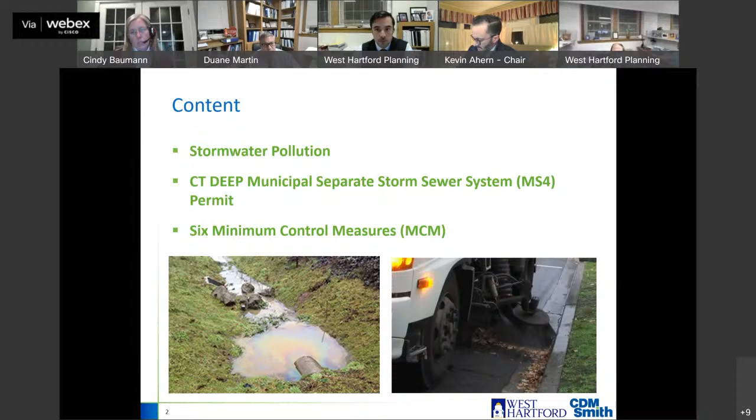I will be presenting, as Duane and Todd mentioned, on the municipal separate storm sewer system, called the MS4 permit requirements, which are part of the Connecticut DEEP permitting requirements. I'm going to go over some background on stormwater pollution, then the municipal separate storm sewer system permit. As part of that permit, there are 6 minimum control measures, which I will go into in more detail. Then I will wrap up with what the town planning and zoning and the IWWA can do to assist with this permit and to comply with it.

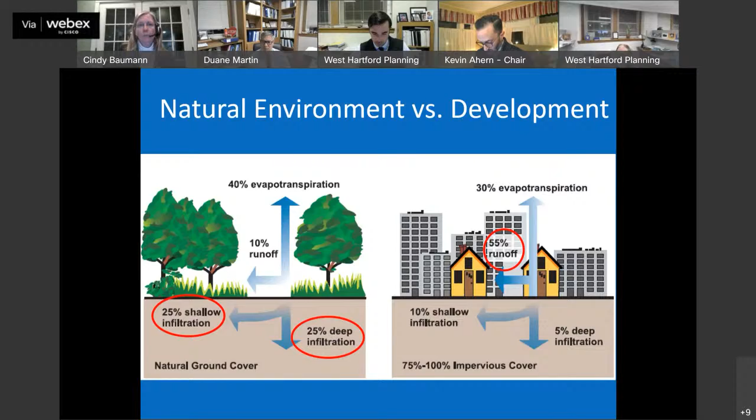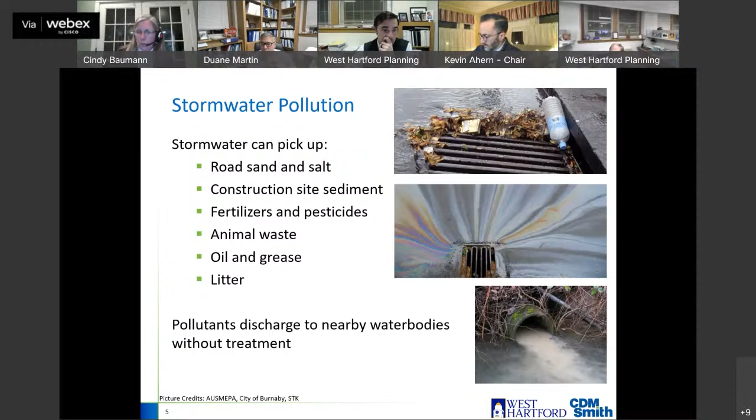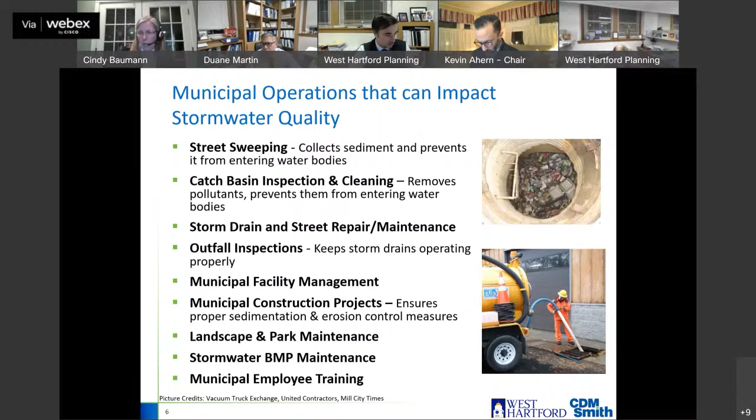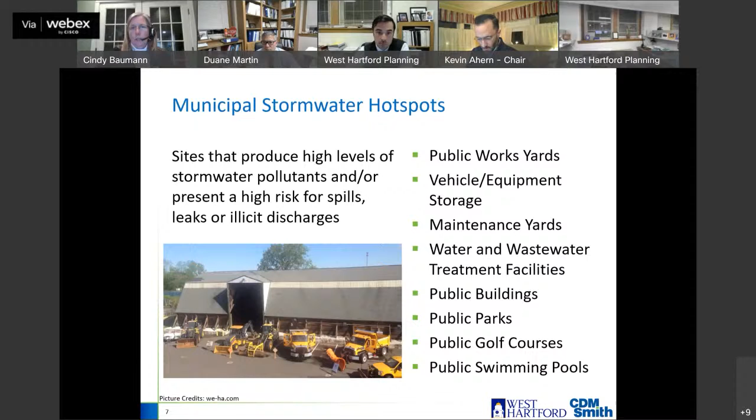And the hotspots can produce high levels of a variety of stormwater pollutants. And also they have a higher risk for illicit discharges, which I'll explain in more detail later, and then also spills. So that is kind of just an overview of stormwater pollution, and I'll take a pause to see if there are any questions.

I have a question. What does BMP stand for?

It is a best management practice. So those are the stormwater best management practices. They can be like a rain garden, or it can also just be like street sweeping or catch basin cleaning - any type of practice that improves water quality.

I just didn't understand the acronym. Okay, thank you. Liz, in your defense, I have all the acronyms here - I had to actually write a cheat sheet for myself, so you're not alone.

Okay, then I will move forward and I will make sure that I explain the acronyms, which I was trying to make sure I do at the beginning of this presentation, but I'm going to move forward now with the municipal separate storm sewer system.

So there's the M and then the 4 S's - that's the MS4 permit, and it's the Connecticut DEEP permit. The Connecticut DEEP has issued both the guidelines for erosion and sedimentation control in 2002, and they have also issued the small MS4 permit. Duane kind of mentioned this, where he had started in the 2003-2004 timeframe on this small MS4 permit. And in the same timeframe, Connecticut DEEP also issued the stormwater quality manual.

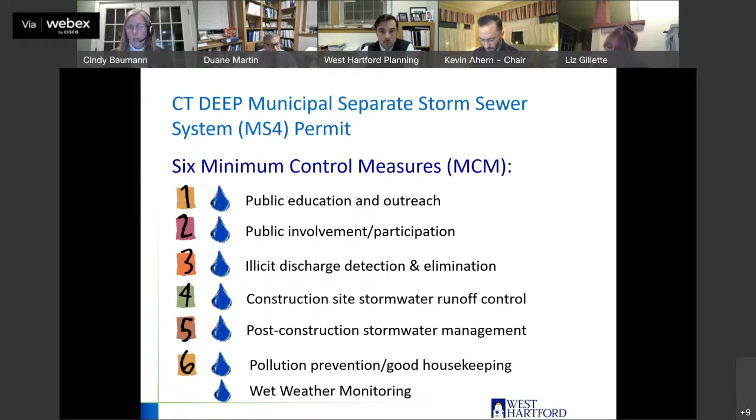So that's just an overview of the permit. We'll just take a pause to see if you have any questions or comments on just the overall permit before I go into each minimum control measure.

I just have a quick question - what is the threshold between a small and something that's not a small? Does that even concern us? Do I even need to worry about this?

Well, the small MS4 permit, there's only one non-small, like there's not a medium really. So the city of Stamford is the only large MS4 that has an individual permit. And then all of the other municipalities, unless you're really small, but I want to say like 90% of the municipalities in Connecticut are a small MS4. So you really won't be the large MS4 unless you're a large city like Stamford.

And the other thing to remember, this is your MS4, your separate storm sewer system. So anyone with a combined system does not fall under this permit. Even though Hartford is large, they do not fall under this permit because they are not a separated storm sewer system. If pieces of their community are separated, those areas would fall under this permit. But a lot of communities with combined systems don't fall under this permit. So you really only have large and small.

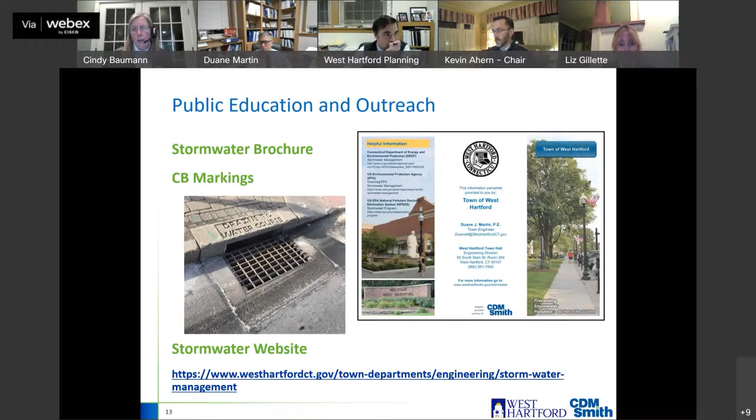And then there are a lot of other public education and outreach items that you do have on your stormwater website. I included the link there for the stormwater website, so you could go on and look at what type of public education and outreach measures have been implemented as part of the stormwater MS4 permit.

So then I've got minimum control measure 2, which is public participation. There were 2 BMPs under this as well, 2-1 and 2-2, which are comply with public notice requirements and then continue stormwater committee meetings.

One of the compliance items under 2.1 is that you are to put your stormwater management plan on your website, and that was done in the 2018 timeframe when that was finalized. Also annually, you have to put your annual reports, and Duane has been very good at putting the annual reports on your website as required under this permit.

You're also supposed to put them out in February for public notice and then finalize them in April. He has been doing that over the last 5 years to get public input on your annual reports.

The next minimum control measure is illicit discharge detection and elimination. This is the one that actually has a lot of BMP requirements, and I think it's the one where the majority of municipalities I work with have to put the largest amount of effort and funding. This minimum control measure includes 8 BMPs.

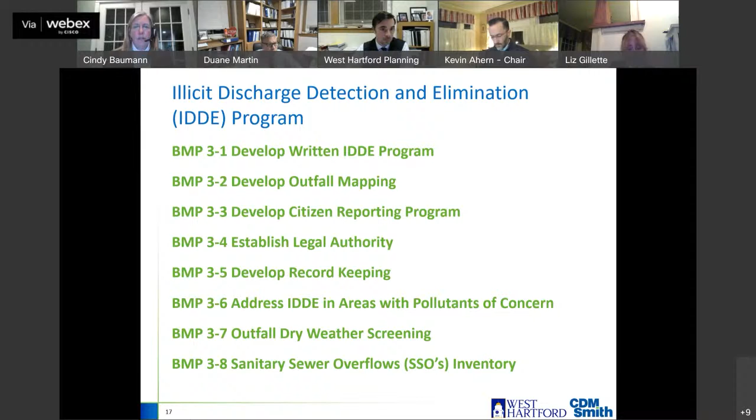An illicit discharge is any discharge to your stormwater municipal separate storm sewer system that does not consist entirely of stormwater. So it has to be something other than stormwater connected to those drainage pipes.

The IDDE program requires you to develop... Question for Cynthia? Yep, so back to that previous slide - it says uncontaminated groundwater. So if there's a construction site and they have to do some dewatering, where can they put that water and still have the town stay compliant? If they have a construction site...

If they're pumping out an area or that kind of stuff, they have to actually put it through a type of sedimentation removal. A lot of times it might be a tank that can remove the sediment, or it can be like a sandbag depression. There are a lot of sedimentation and erosion control measures they can put that water through, and then it can be discharged to the river, the drainage system, wherever it normally went. As long as it's treated and meets the state standard. Fantastic, thanks. Yep.

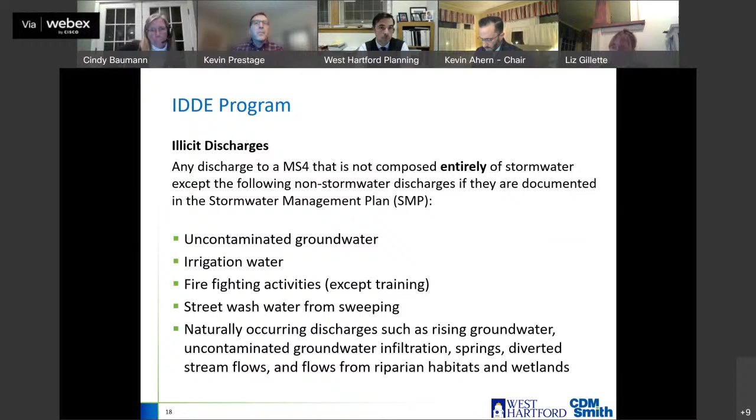The IDDE program was developed in 2018, and the Connecticut DEEP permit has a lot of IDDE requirements - a lot in the permit and a lot in the appendices. As part of this IDDE plan developed in 2018, there were requirements included to address your dry weather outfall sampling, wet weather outfall sampling, notifications to residents and employees, drainage system investigations, and the removal of illicit connections.

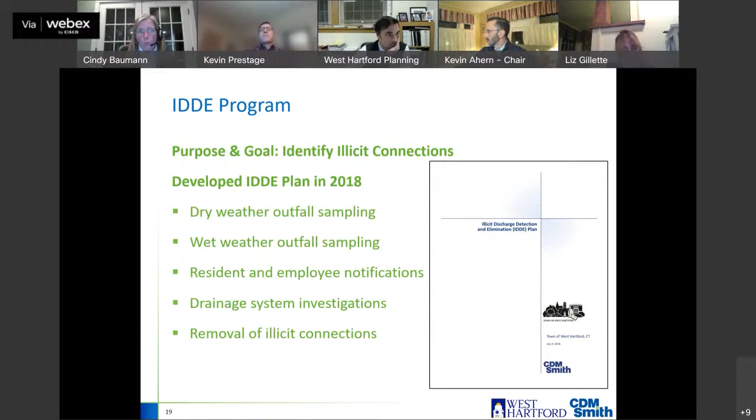I'm going to go over some of these - the dry weather, the wet weather, and the drainage system investigations.

So your outfall screening - you have 418 outfalls in the town of West Hartford. CDM Smith went out and did dry weather inspections of all of your outfalls, going out when there was a dry weather day. There are permit requirements with respect to antecedent conditions and when the last rainfall was, to document that you went out during dry weather.

We would go out with an iPad and document the condition at each outfall. If there was flow during dry weather, we would sample that flow. There's a list of parameters within the permit that we would check to see if there were exceedances for any pollutants of concern.

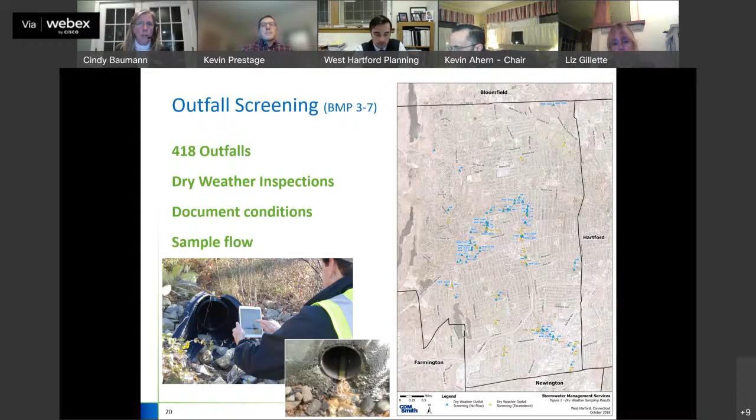So then based on that information, we developed investigations upstream in the systems. We prioritize the outfalls based on the permit. There's permit requirements with respect to how to prioritize, in addition to the results from the dry weather sampling.

We take the outfalls with the highest priority and work up the system, going from manhole to catch basins to manholes, and we sample. If there is flow, we sample for temperature, pH, and conductivity using a meter.

And then we would also do ammonia, surfactants, and chlorine with test kits. If we had some exceedances, we would follow it up in the system and try to identify where the exceedance is coming from. Typically we would identify a manhole with exceedances, go to the next upstream manhole, and it would be dry, or there would be flow without the exceedance. So we'd know something is happening between the two manholes.

So then we would recommend to the town to do CCTV inspection - that's closed circuit TV inspection of the pipe - to see if we could figure out if a particular resident or business was tying in somewhere between those manholes, or if there was some kind of crack in the drainage pipe that was also connected to a crack in the sewer, hydraulically connecting the two.

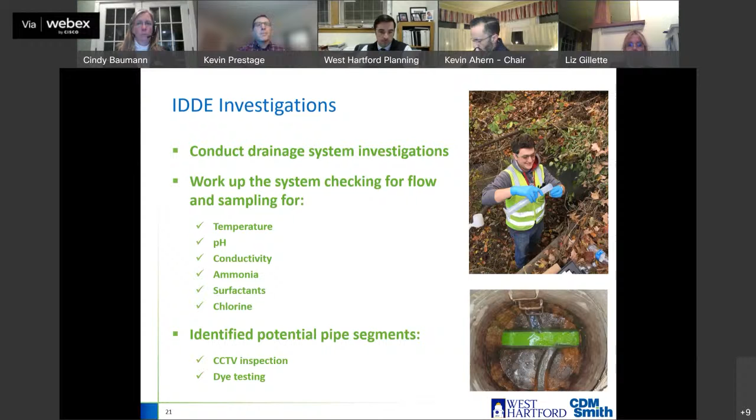It's usually caused by either a blockage in the sewer, where the downstream pipe is blocked and it has to come out the manhole, or it can also occur during I&I, which is your infiltration and inflow.

So during rainfall, when the sewer system is taking in rainfall runoff or groundwater and infiltration, and it does not have the capacity to convey the sewer flow plus the infiltration and inflow, you have a sanitary sewer overflow. You can also have a malfunctioning downstream pump station or a broken sewer line. It's important to identify these, and as part of the MS4 permit, you have to track and document them. There are also reporting requirements to Connecticut DEEP with respect to sanitary sewer overflows.

So this is the end, the last slide of the IDDE, where I wanted to give you some examples of where you may see an illicit connection and should report it to Duane in engineering so they can document it and potentially remove that illicit connection.

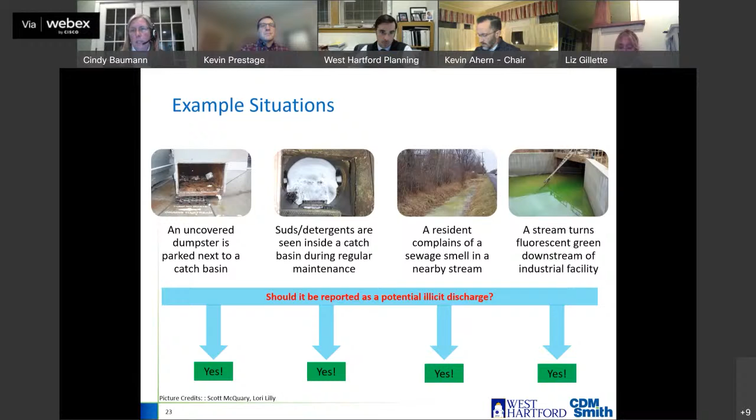So all four of these examples are ones that if you see it while out and about, or a resident sees it and tells you about it, it is a potential illicit connection, and it should be documented and followed up. That is the end of the IDDE, and I'll pause here because I know this is a big program and a big component of the MS4 permit. So I'll see if anyone has any questions.

Liz: I'm just curious, I'm not asking for a final or exhaustive list, but do we have a lot of problems in West Hartford when you've done the checking of the outfalls? Compared to other municipalities, are we...?

You do not. I think it has a lot to do with not having as many older systems, because I do see the older the municipality, the more problems—and not necessarily just older, but older and industrial. I also think West Hartford is proactive. I don't know what you've done in the past, but you've had a positive impact, so you don't have as many illicit connections compared to a lot of the other municipalities I work with.

I just wonder if we've got suds in all our sewers or not. That suds picture is actually from Hartford. Of course it is. Thank you. Yep, Cindy, thank you.

If I can just ask, or rather add a little additional information—if you go back to the slide on the sewer overflow. On the sewer, this one? Yep, yeah, that one right there. Thank you. So Duane Martin, I just wanted to comment.

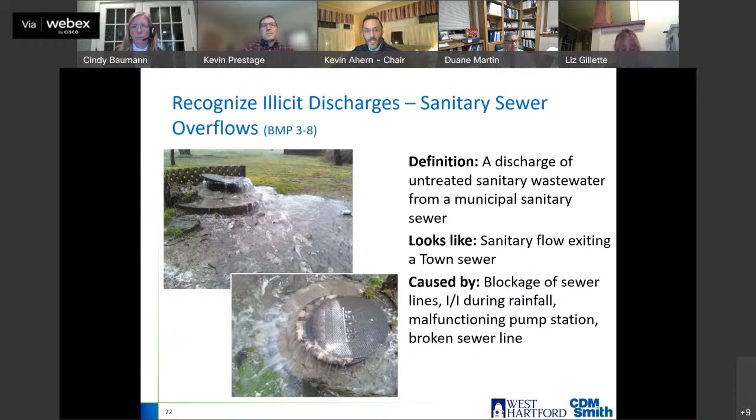So I'm going to go over minimum control measure 4 now, which is construction site runoff control, with respect to your sedimentation and erosion control measures.

Before you go through these BMPs, this area in particular has the most relationship to the role of TPZ and IWWA, and it's important to understand where you are in the broader context of this larger permit. When you go through an approval process, you'll see that we do reactive and proactive enforcement of the approvals you grant to different land uses, as Cindy will show in these slides. This part in particular has a direct relationship to the work you do for the community.

Go ahead, Cindy. Thank you. So this minimum control measure for construction site runoff control has 5 BMPs.

It's implementation and enforcement of land use regulations, development and implementation of interdepartmental coordination, review of site plans for stormwater quality, conducting site inspections for sedimentation and erosion control requirements, and implementing procedures for public comments.

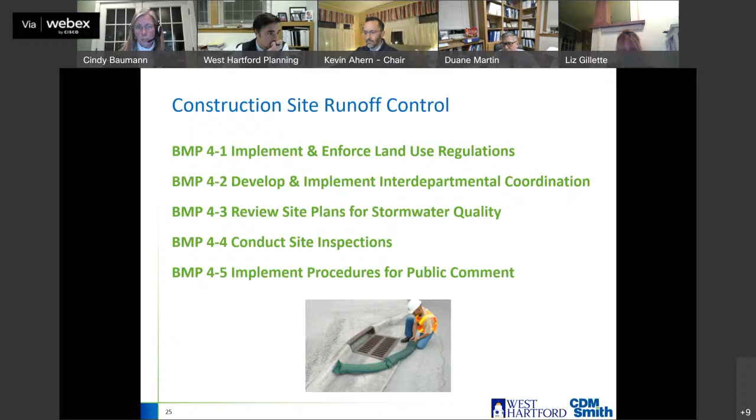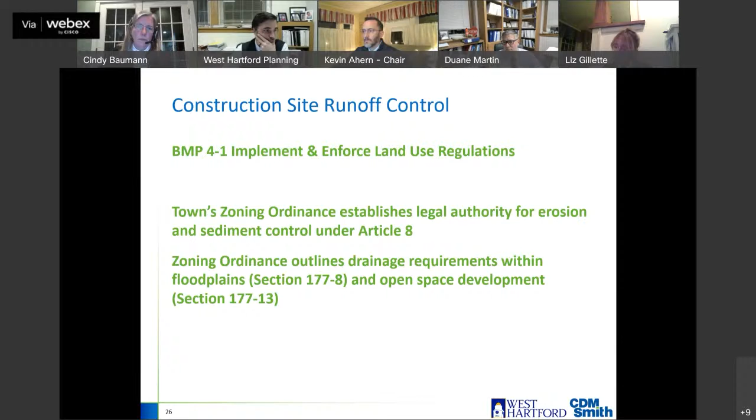I'll go over 3 of these BMPs in more detail. With respect to BMP 4.1, implementation and enforcement of the regulations, the West Hartford Town zoning ordinance establishes legal authority for erosion and sedimentation control under Article 8. The zoning ordinance also outlines drainage requirements within floodplains and open space under sections 177-8 and 177-13 respectively.

The Connecticut DEEP has guidelines for erosion and sedimentation control, this is the 2002 manual released to give guidance on soil erosion and sedimentation control requirements. I want to touch on two main pieces of this document.

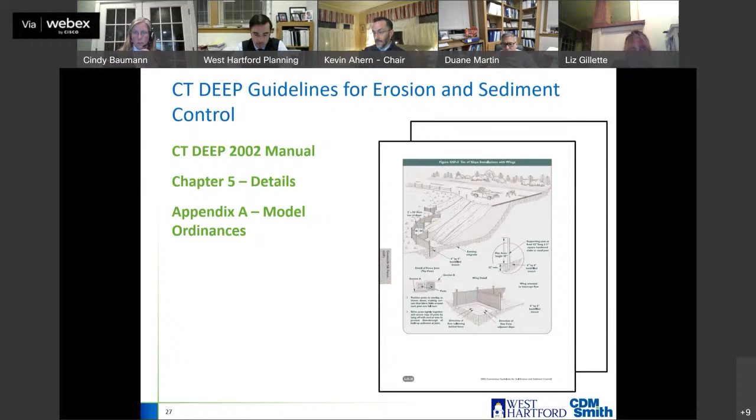The first is the Chapter 5 details, which provide a lot of guidelines with respect to different sedimentation and erosion control measures. I pulled out an example here, a silt fence, which gives details, requirements, and recommendations. It's a good resource both for contractors who want to use these details, and for you when you're in the field doing inspections and want to refer to a document to support what you require from the contractor.

Appendix A of this manual also has model ordinances and some model ordinance language to include with respect to sedimentation, erosion, and control within your ordinance.

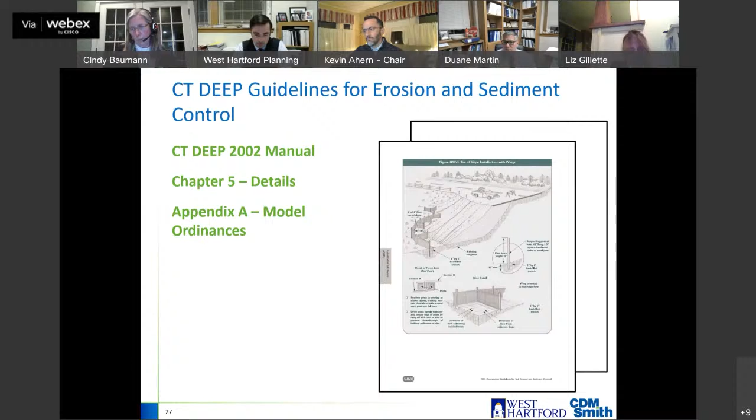I did a little background work, mostly with Todd, and he provided some information because you guys do really well with inspection reports. I have an example here of a recent report where you went out in response to a complaint, conducting soil erosion and sedimentation control inspections.

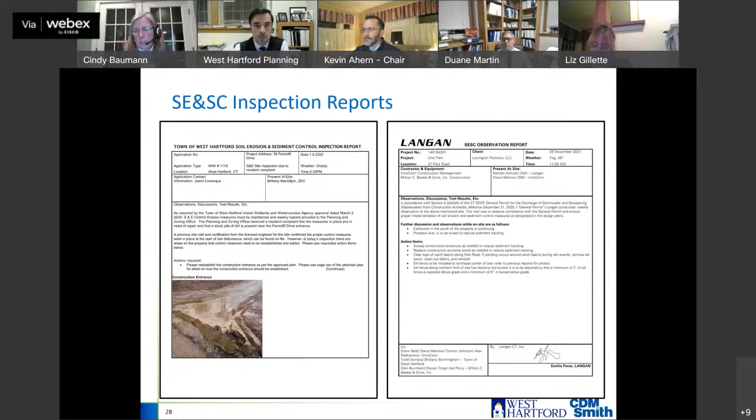I also have an example of one where a contractor submitted a report, as required under the MS4 permit for annual submittal of sedimentation and erosion control reports from contractors. This example was submitted by InnoCon Construction Management, who provided a second page with very good photos of what they're doing on that construction site.

Cindy, if I could add, these often come as conditions of approval from your wetland authority or special use authority, or in this instance on the right side of the screen, council's SDD conditional approval. It's to perform weekly or bi-weekly S&E control inspection reports, or after significant rainfall events. We get the reports, read them, follow up accordingly, and there are action items for correction or items to address. The item on the other side is an IWW approval.

Cindy, could you touch upon the fact that there's actually a threshold trigger, a certain acreage, at which these reports are required?

If it falls under an acre, they're not required. Is that accurate? It's a 1 acre threshold. A lot of our inspection reports and sites are under 1 acre, but we still do the same reporting and inspection requirements regardless of size, because they can still have a negative impact in terms of offsite erosion. The example on the left, that property was under 1 acre and wouldn't have been triggered under the normal requirements, but we still apply them.

That's a great credit to both Brian Pudlick, Associate Planner, and our zoning enforcement staff. They stay on top of these, and we apply them at all scales, even those that aren't required by the MS4 permit. That is typical with most municipalities, that they apply it to all construction, and don't really require that 1 acre or above.

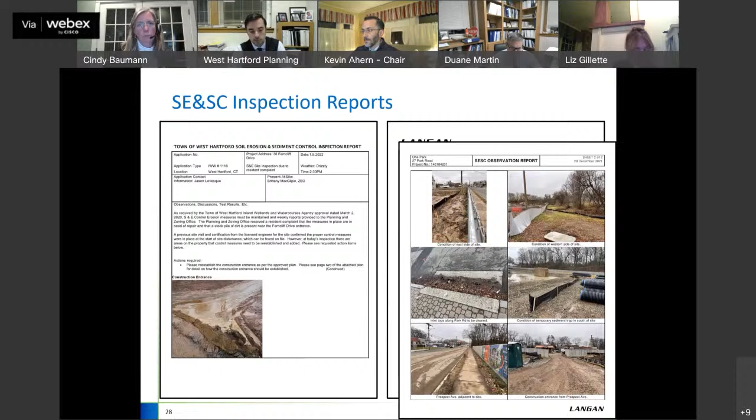With respect to construction and illicit discharges, these discharges from construction sites are considered illicit discharges under the MS4 permit. When they have soil erosion and sedimentation control measures that are not performing correctly, you get heavy sediment and turbidity and discharge of runoff from the site that's not just stormwater. So when you see brown or cloudy water coming off a construction site, that is an illicit discharge, caused by improper sedimentation and erosion control measures.

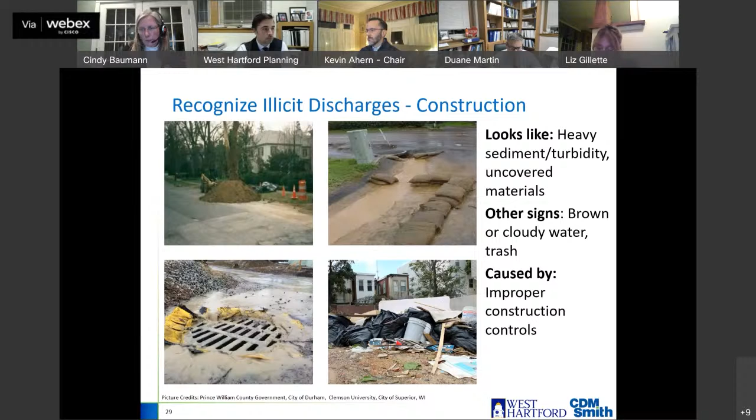So that is minimum control measure 4. I'll pause for a minute in case there's other questions, because that's a big one. TP&Z and IWWA do play a big role in minimum control measure 4, as well as the one coming up, minimum control measure 5.

Okay, so we'll move on to minimum control measure 5, which is your post-construction stormwater management. This minimum control measure has 5 BMPs as part of your stormwater management plan. The first is establish low impact development authority, and then enforce those low impact development requirements. Implement your long-term maintenance plans, and then directly connected impervious area mapping.

I'll go into more detail because I know the DCIA, or directly connected impervious area, is probably unknown, or you probably don't really know what that entails. The last BMP was just post-construction in areas with pollutants of concern.

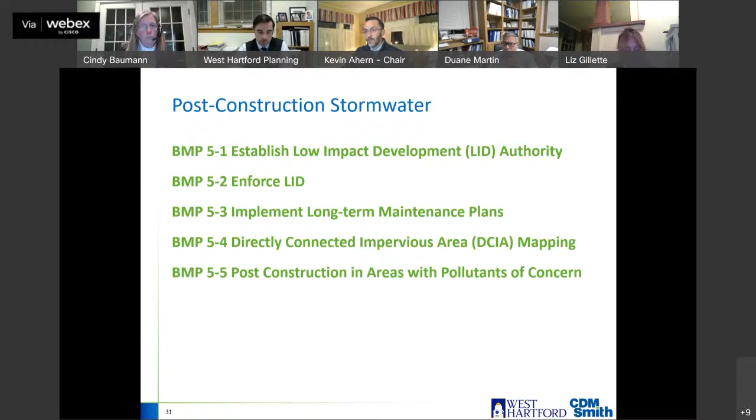With respect to establishing low impact development authority and enforcing this low impact development, a review of your regs resulted in the 3 comments I have below. The town subdivision regulations require review of subdivision drainage system plans. The town's plan of conservation and development provides guidance on what should be included in the stormwater management plan, including implementation of best management practices and low impact development.

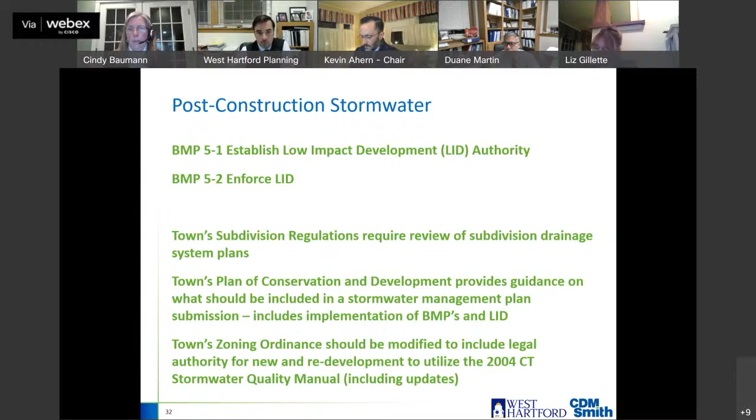We do make a recommendation that the town zoning ordinance should be modified to include legal authority for new development and redevelopment, and to utilize the 2004 Connecticut Stormwater Quality Manual, including the updates. The updates do incorporate a lot of these low impact development recommendations and requirements.

So the 2004 Connecticut DEEP Stormwater Quality Manual included a lot of stormwater requirements, and it also started to include low impact development requirements in the amendment in 2011. I wanted to touch on 4 different parts of this manual. It's a very good manual to use.

Instead of every municipality creating their own stormwater requirements, you can incorporate language requiring a developer to meet the 2004 Connecticut Stormwater Quality Manual, and then you don't have to be the one developing all the requirements. Most Connecticut municipalities are doing this, referring in their ordinances to this Connecticut Stormwater Quality Manual, including appendices or amendments.

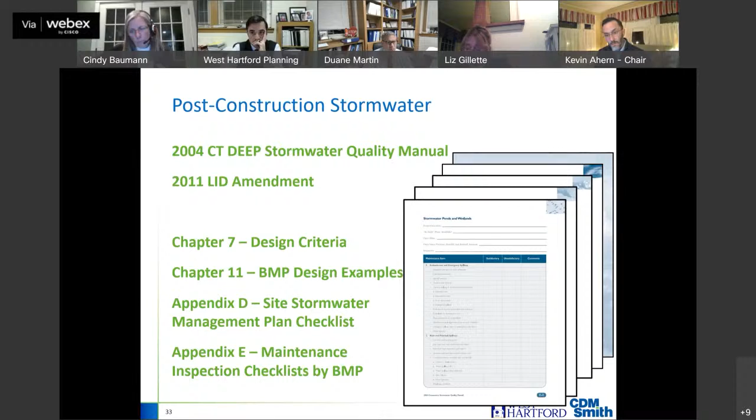The other piece that is part of the requirements in minimum control measure 5 that we're in right now is this DCIA - directly connected impervious area. This is where you have impervious areas that are directly connected to each other, and directly connected to the drainage system. As part of the permit, they wanted the town of West Hartford, and every municipality under the MS4 permit, to develop a baseline directly connected impervious area for your municipality.

The town of West Hartford has done that. You guys are 14.4% of your townwide area is directly connected impervious area, and that equates to about 2,066 acres. The MS4 permit requires you to do a 2% reduction in this DCIA over the permit term, and then a 1% reduction for every year following the permit. So that 2% reduction is 41 acres.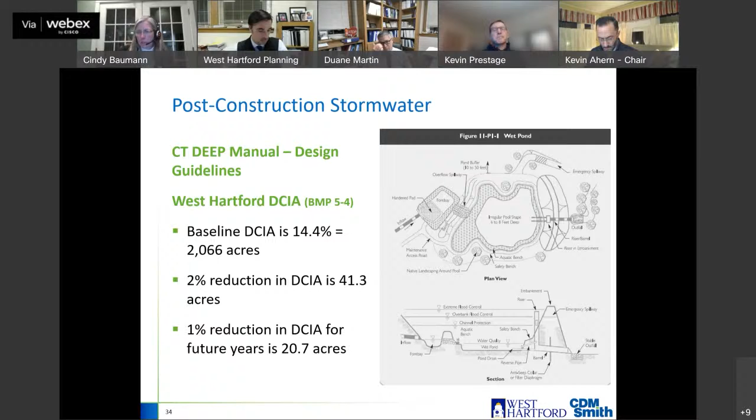Okay, so I have a little bit more on this minimum control measure, mostly with respect to low impact development. I have an example here of implementation of low impact development in a redevelopment site: the Capitol property in Hartford. CDM Smith was fortunate enough to work with the city of Hartford at the Capitol, and we implemented, I want to say about 6 or 7 years ago, stormwater BMPs, best management practices, at the Capitol.

This is to improve water quality, and it's also a really nice pilot place where you can go—they have a pamphlet, and you can walk around the site and see these low impact development BMPs in place, and they were all retrofits. We constructed 3 rain gardens at the main entrance, 2 on either side, and then a little ways up we also did permeable pavers at the crosswalks and in an island, and then we also did a green roof.

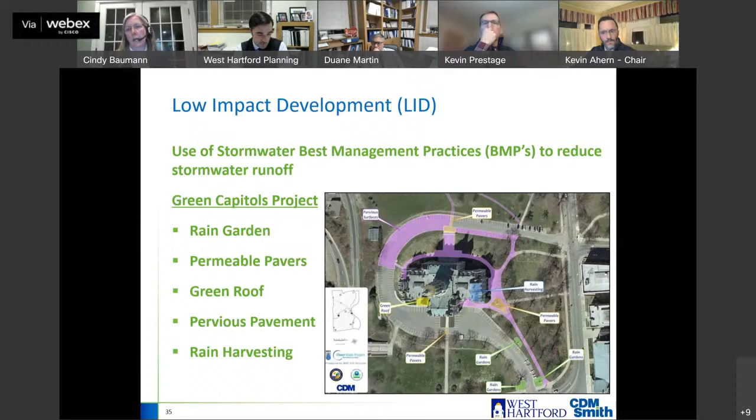I do have a question about the pervious pavement. In some areas it's in great shape—they've done it out at Whole Foods in Avon, and I'm very curious to watch that. In other areas, talking with legislative management, they've had real problems with frost heave, it breaking apart and disintegrating in spots.

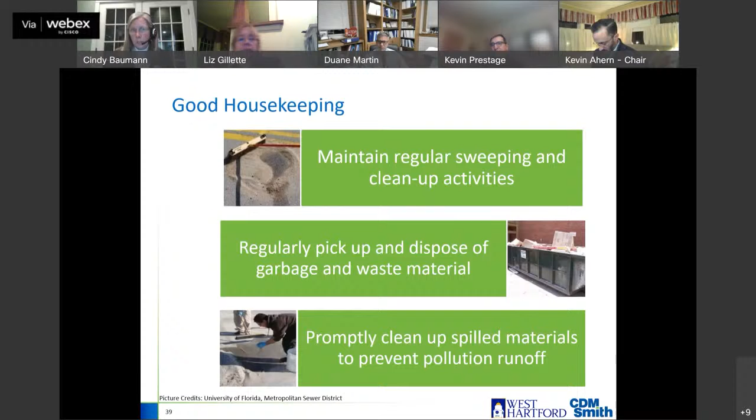So the last one is wet weather monitoring, added on to the 6 minimum control measures. This one is kind of weird because it's just called an S instead of a BMP or minimum control measure, like 1-1 or 2-1. It's called S, and I don't know why, but that's Connecticut DEEP. So wet weather monitoring has these BMPs S1 through S4.

What's required in the permit is you actually have to go out during a wet weather event and do outfall screening. You have to do an inventory and mapping of all the discharges, the outfalls that discharge to impaired waters. I'll show you a map in a minute with the impaired waters in the town of West Hartford, and then there are follow-up investigations based on that wet weather screening.

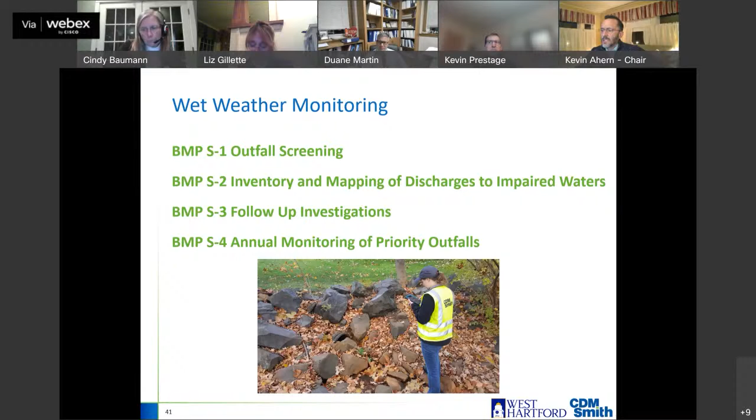Then there's annual monitoring of the top 6 priority outfalls. So outfall sampling is wet weather inspections of all your outfalls, and there are requirements for the qualifying rain event with respect to antecedent conditions and the amount of rainfall, and also qualifying with respect to the lab and when they can receive your samples.

You are testing for temperature, pH, and conductivity using a meter, and then typically you send ammonia, surfactants, chlorine, and bacteria to the lab. If you have impaired water that's impaired for something other than those, then you would also sample for that pollutant of concern as well.

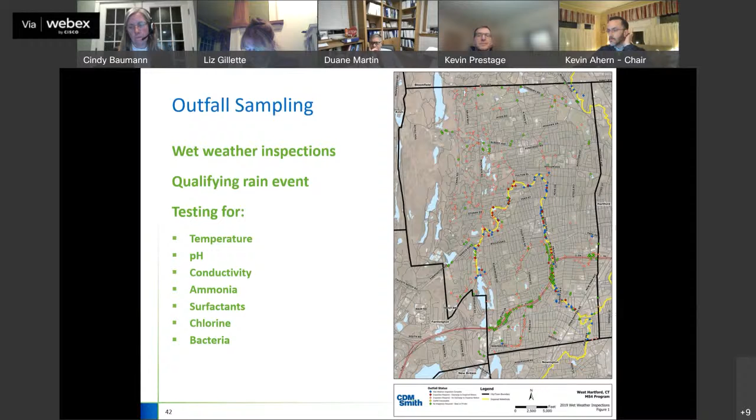My final few slides are just to give you a little guidance on what town planning and zoning and the IWWA can do with respect to MS4 permit requirements. As I think Todd had mentioned, minimum control measure 4 and minimum control measure 5 are kind of the most important for the TP&Z and IWWA with respect to sedimentation and erosion control requirements and post-construction site development requirements for stormwater. Those are the 2 you contribute most to conforming to.

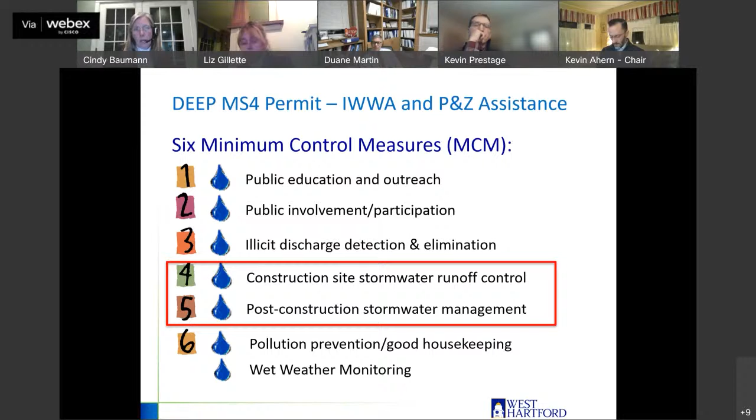I also wanted to highlight minimum control measure 3, illicit discharge detection and elimination. At the end of each presentation, I tell town employees, board members, and volunteers that it's really everyone's job to keep an eye out for these illicit connections, because they typically aren't occurring all the time - they're intermittent, and you are the eyes of the town.

So when you're out there, if you see someone dumping oil into a catch basin, you can go out and educate that person. Or if you see suds in a catch basin, you can let Duane know and they can follow up. I think the IDDE is a big thing where it's something that everyone can work on.

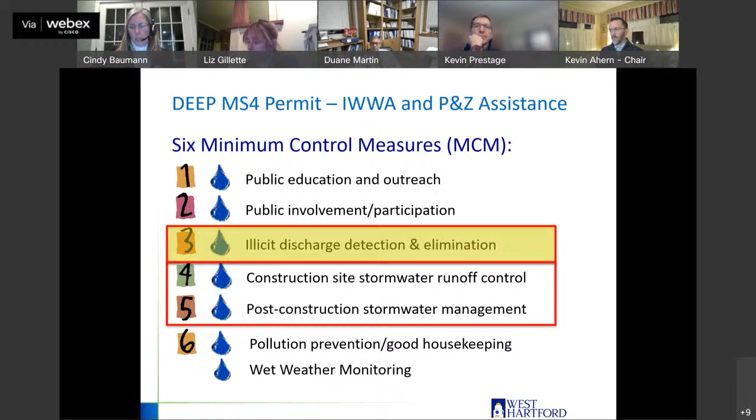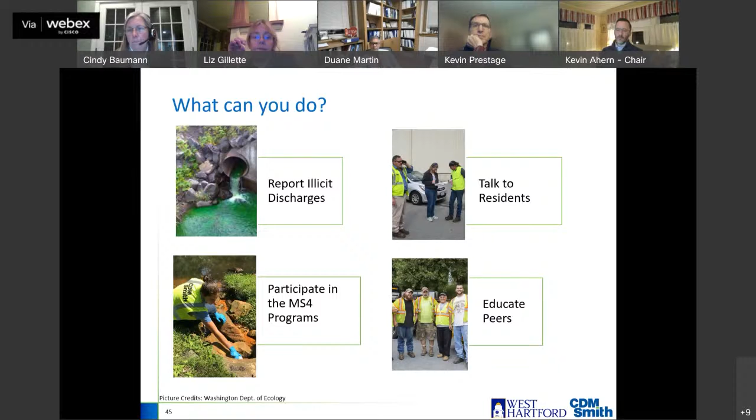So I do have a slide on that. What you can do is report those illicit discharges, talk to residents not only about IDDE but all the MS4 requirements, participate in the MS4 program, and educate your peers.

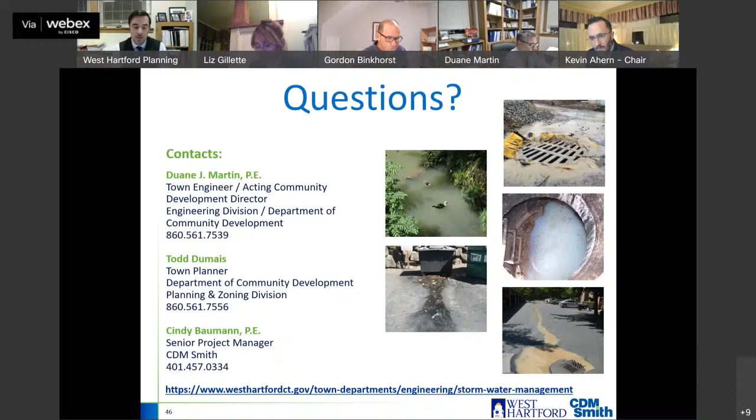But I'd like to suggest that we take a stab at looking at what we heard last time. There was a line-by-line review code ordinance worksheet provided by the NEMO folks, and take a look at both our subdivision regulations and our zoning regulations for LID best practices. Apply that as a benchmark, and then take the 2011 stormwater control LID section and explore that with the TPZ a little bit more thoroughly, so we can get an idea of where we are, where that manual says we should be, and where we might want to go as our next steps in this discussion. Just wanted some feedback on that approach.

And Todd, as far as a vehicle for that discussion, how do you think the next discussion should be placed? Where is that best had? So we have two options. Obviously if we have a lighter agenda, we can carve out part of the agenda if I know there's going to be a light regular meeting, or we could carve out some time for a special meeting once we're prepared and have done the analysis of the regulations involved.

Completely up to your preference as a commission and agency, given your time volunteering here. Well, only insofar as I want, because this has been a really valuable discussion, and I want to make sure the momentum built by this discussion continues. So only insofar as you guys need time to give us something complete. But I don't want to say a date certain - is there a range certain in which we could expect to see that?

I think we could be prepared to present something early beginning of March. We need a little bit more time because it's a bit more labor intensive on our part to go through and formulate the discussion, so I think that'd be reasonable. And if we could carve out time ahead of time, figure out your availabilities, we could certainly do it in a special meeting. All right.

So I think, and I sort of call on my fellow members, to make sure that we all remember to ask as we get closer to that date. And obviously, insofar as you guys have so many things to do - and frankly this presentation makes me realize how much more is happening behind the scenes that we don't even see - we will check in with you, and if you need more time, just let us know. But we want to make sure we're dialed into it and hearing it. If it can't be March, that's fine, but that's a good one to shoot for. So let's look at March.

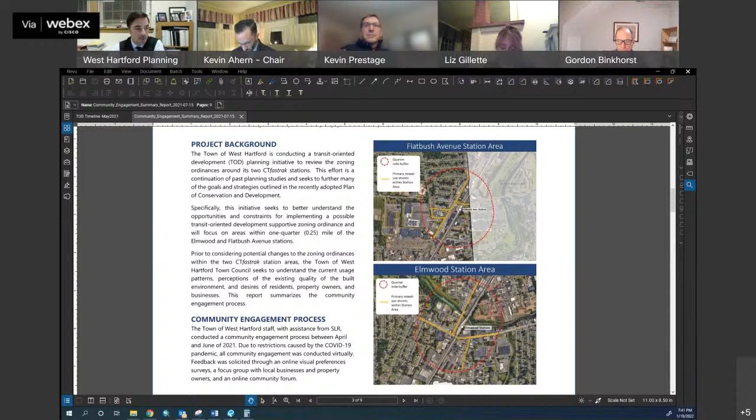We did an engagement process involving a couple of public meetings as identified in the report, virtual public meetings with both the business associations and the community at large, and we conducted an online visual preference survey, which was very informative.

Some critical takeaways from those responses were that there wasn't a high frequency of usage of respondents who actually visit the station areas, but a lot of folks who participated did visit the area regularly for shopping or food services. The vast majority currently access those station areas via car, 8% on foot, and a smaller percentage via bicycle.

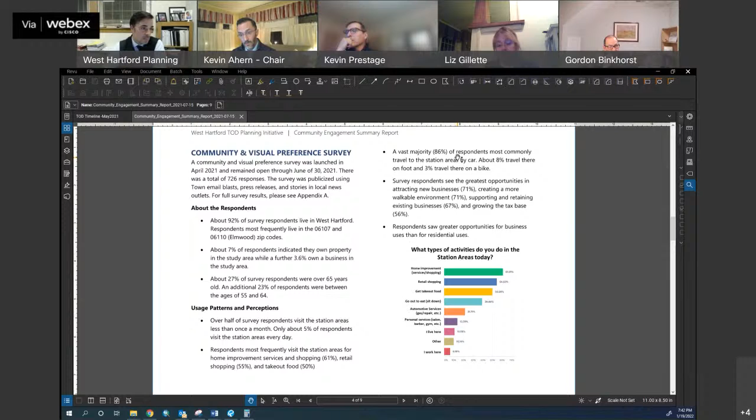What we did that we haven't done in the past, and which was very informative particularly in the context of developing new zoning, was to create a visual preference survey. I sent this out to everyone on the commission and encouraged you all to participate in that process. We provided illustrative examples of design types or images that infer design-based concepts.

Such as, what kind of preference do you envision in the Flatbush station area in terms of story height? Do you like parking behind the buildings, right up to the buildings, on the side of the buildings? These were the type of questions we asked. We broke out both Flatbush and the Elmwood station areas separately because we wanted to understand whether the community or residents perceive these as distinctly different station areas, or whether we should treat them the same. There might have been a preference.

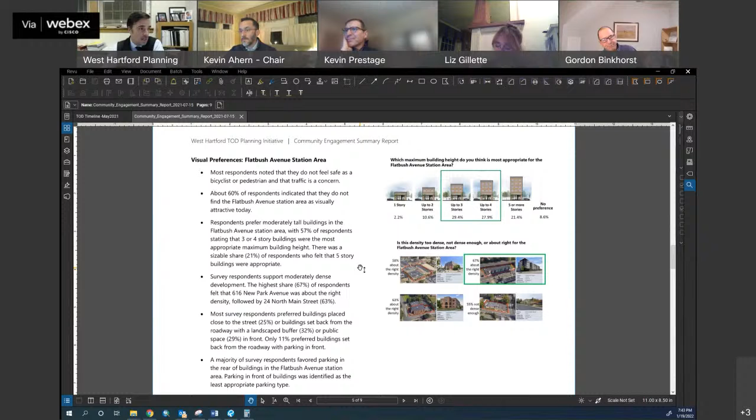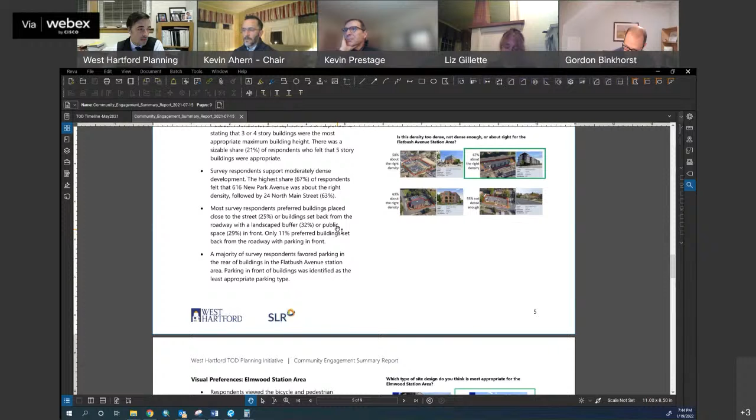With respect to the Flatbush station area, about 60% did not find it visually attractive today. Most, about 57%, found 3 to 4 story buildings appropriate, with 21% favoring up to 5 stories. About 67% felt that the 616 New Park was the right density, an image we provided showing street placement of buildings with a small landscape buffer. The vast majority wanted parking to the rear of buildings.

What we saw in the Elmwood station area was virtually identical response rates and preferences: moderate height buildings, 3 up to 5 stories in some instances, with moderate density around the 616 development type, and parking in the rear. So we determined there wasn't a distinct preference for different treatment of either station area.

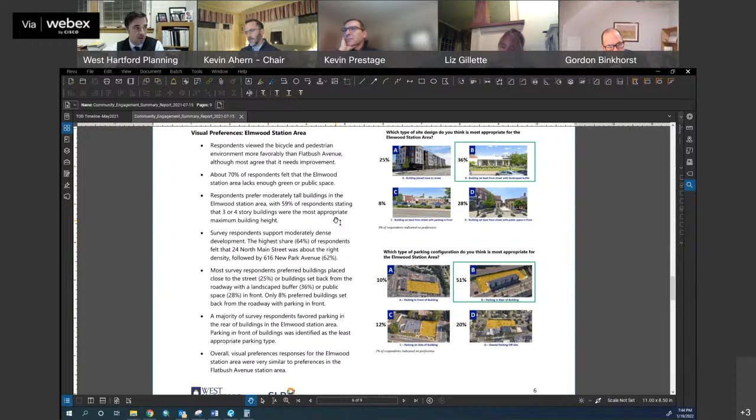We largely heard the same thing from the focus groups and the community forum, that there was a strong preference for development and continued dialogue to build a sense of community around these station areas. Most participants were envisioning improved streetscape, more green space, and infill development with a greater mix of land uses.

Particularly, there was a lot of commentary noting fields of overdeveloped or underutilized parking, depending on how you're looking at it. That could present great opportunities for infill development in parking lots to better activate the street and create a more walkable, pedestrian-friendly environment within the corridor.

There was also a very strong preference by both business associations and the community that it's important we retain and keep existing businesses and provide a more flexible place for them to grow within that area, but also provide for new uses to be attracted there, including residential.

And so those are kind of the key findings of the takeaway. Just making sure everyone saw that. There's a switch, a snake-like timeline on your screen now.

Just as a reminder, as a commission, you're very familiar with the town's past efforts, but this is an ongoing dialogue that really goes back, I would argue, to 2013, when the CTfastrak stations were in the planning phases and under construction.

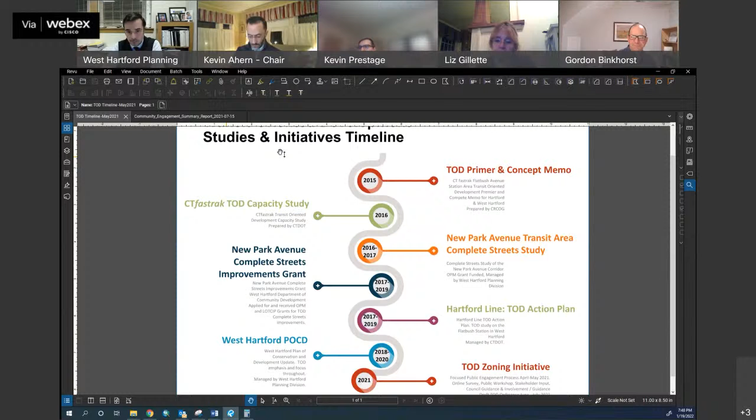So all of that to say, we have created a draft ordinance. We shared it with the council and the business association in the past month and a half, and we'd like to do more outreach. Here, our next stop in that outreach effort, I would like to, after this meeting, share that ordinance with you.

And then put this on our February agenda to get additional feedback on the construct of the ordinance. What it attempts to do is focus all the feedback we heard today on what our POCD suggests and create a new tool that may be, and likely would be, a new rezoning around the station areas that creates a more transit-oriented district.

I don't know what the acronym we come up with is, but it would focus more on design first, meaning that we're going to try to encourage placement of buildings, preserve mixes of uses. There might be some uses that are deemed incompatible with TOD, and then provide some other incentives: slight increases in density in terms of residential units per acre, slight increases in FAR, and then create a menu of bonusable standards. That's something unique that we don't currently have.

That menu is a series of incentives. If a developer wants to build a little bit more units per acre, or a little bit less parking, or provide for maybe a little bit more FAR, they could choose from a series of incentives that are encouraged by either the POCD or the feedback we heard.